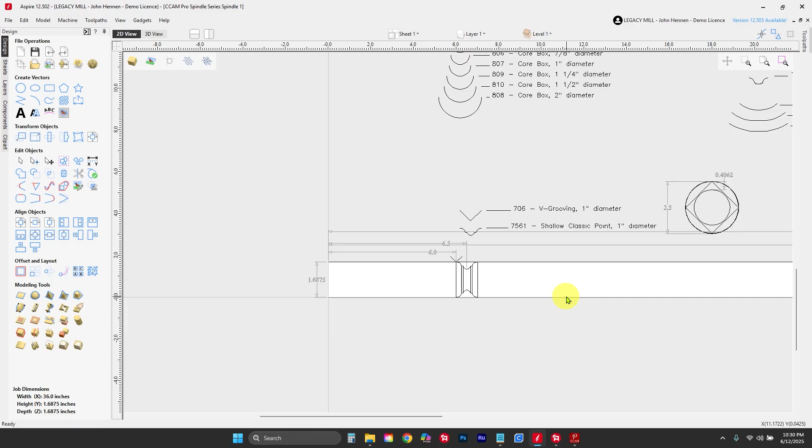Let's take a look at our first spindle. Our first spindle here we know is 36 inches long total. We know that the finished is going to be a 1.6875 or essentially 1 11/16. We know that our V-bit's going to start here in the transition from square to round at 6 inches. We know from 6 inches down to 30 inches, we are going to need to turn it round. We're going to turn it round to that 1 11/16.

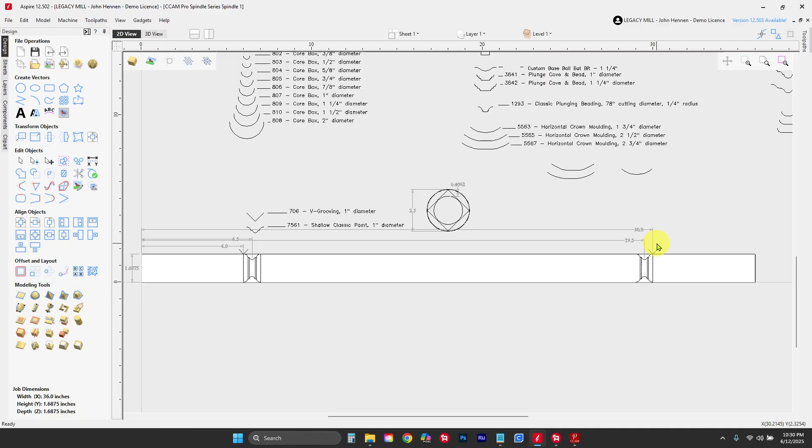And after we're done doing that one, we're going to plunge in with our shallow classic point right here, and we're going to drop that one down at 6.5. Let's go ahead and start working in Conversational CAM Pro. Now, the first thing we have to do is we have to actually start a project. So we're going to go here to Project, and we're going to make a new project. And this is going to be a 36-inch spindle, and this is going to be the CCAM Pro series. Gotta spell that right.

All right. Now we're going to be working in the turning center. In the description, I'm going to call this 1.75 by 1.75 by 36 square blank. And you could make this the Hennen's staircase baluster, or the Anderson staircase baluster. You can name it whatever you want to make sure that you remember what you're doing it for. All right, so let's go ahead and click on Save. Got it? And let's do this and select. Now we've defined what we're going to be working on.

We're going to click on the turning center here, manage our parts, and let's add a part because we're going to need one of those. Let's go to a new part, and the part name is going to be 36-inch square blank. And in here, we're going to make a multi-sided blank. The length is going to be 36. The thickness is going to be 1.75, and the number of sides is going to be 4. It's not tapered, so we're going to go ahead and save this one here. And here we have now our blank, all laid out and ready to go. We go ahead and select here, and click on it.

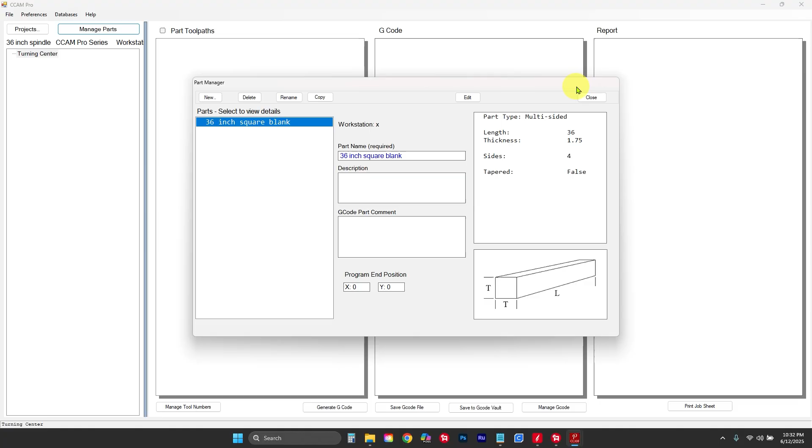We have our blank now, and now is where we start adding all of our tool paths. So you can notice that first we had to define the project, and we had to define what we're working on, and now we can start our tool path. So we're going to manage our tool paths here. We're going to do 3 separate tool paths. We're going to start by going to turning, turning round. We're going to add that one. The second one will also be turning, and that's going to be a tool profile. And the third one will also be a tool profile. Once we've got all those in, we click on close.

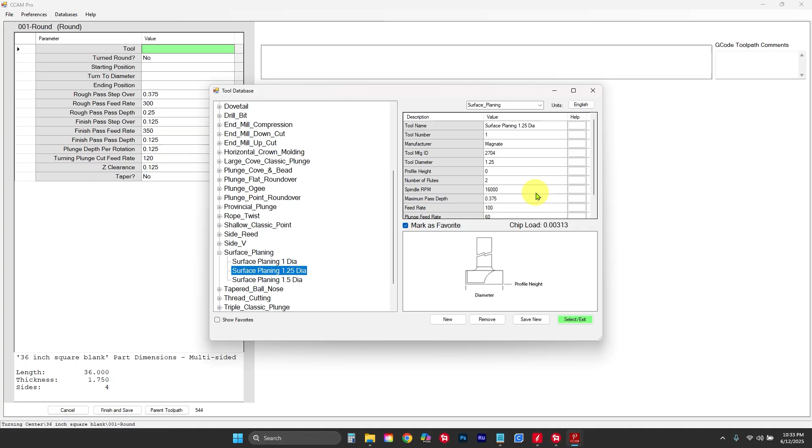And you'll notice over here that they're all red. Now red just means they haven't been programmed yet. So we're going to go ahead and select our first one, which is round. Okay, and turning round, we're going to pick our tool for that one. Now when I'm doing this one, I always like to use the 1.25" surfacing bit. Let's go see where you can find it. I'm going to surface planing, 1.25". Here it is. I'm just going to leave that there and click on select and exit. I'm going to make this default tool number 1 because it's the first tool in my program.

If you're using an automatic tool change machine, tool numbers are very important. If you're using a manual tool change machine, they're still pretty important. You can't have 2 tool numbers that are the same if there's a different geometry. In an automatic tool change system, you've got to make sure that each one of them are different so that the machine knows which station to grab those tools from.

First question, is it turned round? And the answer is absolutely not. So that stays no. Our starting position, 6. We're going to turn to the diameter of 1.6875, 1 11/16. The end position is going to be 30. We're going to come down here all the way to the bottom. Everything else is already answered. Let's go over them real quick.

Rough pass step over. When I'm just taking off material, we're going to go at a pretty quick step over, go 3/8 of an inch. It could actually go more. Rough pass feed rate. Now this is set at 300, but I'm pretty impatient, so I'm going to make that 600 instead of 300. Rough pass depth, 1/4 inch. That's phenomenal.

Finish pass step over, 1/8 of an inch. That's going to give us a nice clean diameter there, no tooling marks, things like that. Finished pass at 350, I'm going to bring that up to 450. You'll notice it's a little slower and we're taking a little smaller bite. We're going to get a nice clean finish on there. Everything else I'm going to leave the same.

I'm just going to click on finish and save, and we now have this one that's no longer red. So if we want to see what that toolpath looks like, we can click on it here, say generate G code, and here is all of our code. Let's grab our turning round bit right here, and it's going to do the work for us. Quick, fast toolpath, and all we're doing is we come back here and we're going to turn it round from 6 to 30.

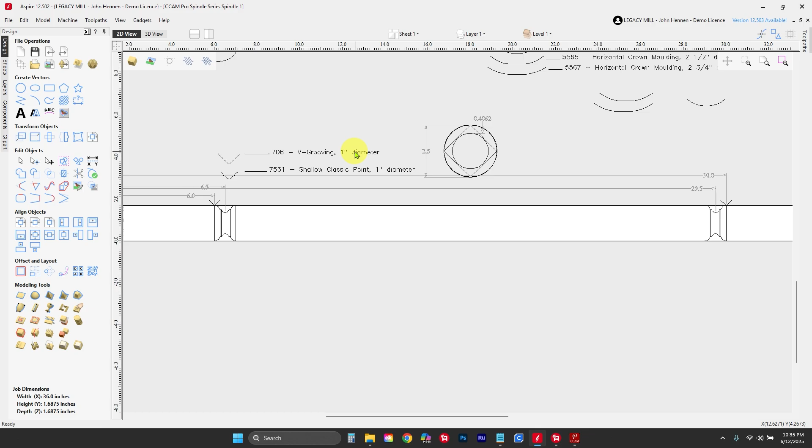Now right at 6 and right at 30, our next step is to add that V bit. Now this one's a little tricky. You select our tool, and we're going to make sure we get a V bit big enough to do the job. When I came over here, I noticed that 706 with a 1-inch diameter is going to give me a 1/2 inch height, and you'll notice here that we need a 0.4, so that's going to be perfect.

Section diameter is going to be 1.6875. X-axis position is 6. Use profile height? On this one's case, no. We want to make our cut depth 0. And what that's going to do is bring it down, touch that, whip around once to clean it up, looking really nice, and then we're good to go.

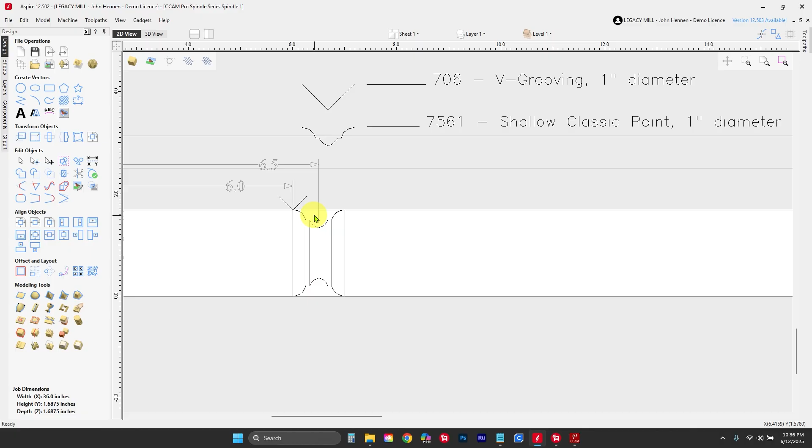What's important here is our climb mill side is the left. Look at this one right here. On this first one, I want my left side to be nice, because my right side's going to be machined off anyway. Okay, everything else looks fine. We're going to say our next one is going to be 30. Now this is the cool part about CCAM Pro.

Go 6, 30. And now we have 2 options. We can just go ahead and say finish and save. If you look at this one here, go finish and save. Now let's generate our G code again. If we come down here, we're going to have our first toolpath right here at 6 inches, and because we put a comma in there, our next one right there at 30. Now that's pretty phenomenal in my book, because by only adding one tool profile toolpath here, we can actually put it in multiple locations. Really like that feature of CCAM Pro.

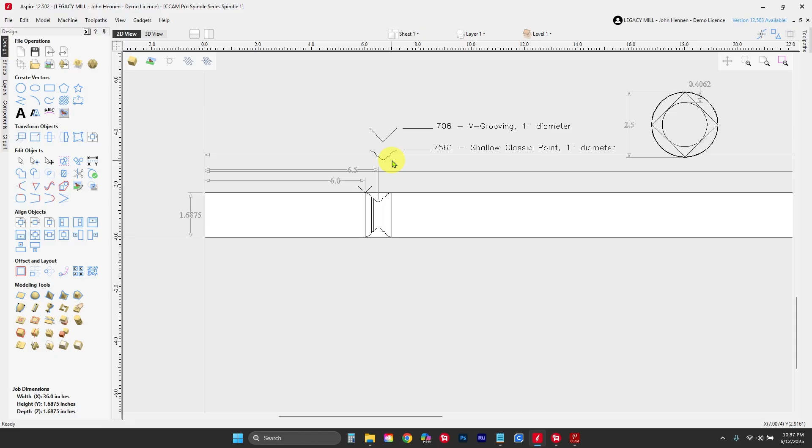Now let's go on to tool profile number 3. And this tool, this time, if we remember it - and I don't, so we always have to look - it's the 7561, the shallow classic point, 1-inch diameter. Let's go find that here. Let's go see what we've got. Shallow classic point, 1-inch diameter. All right, make sure it is the same, 7561. We're in business, go ahead and click on that one.

We're going to assign a new tool number, it's going to be number 3. Section diameter again is 1.6875. Our x-axis positions on this one are going to be 6.5, comma, 29.5. Use the profile height on this one? Absolutely. What that's going to do is give us this nice plunge shape right down into our board. Okay, we're happy with that one. Climb milling looks great. Finish and save, and let's go ahead and generate that G code.

Now we have 3 tools: tool 1, tool 2, tool 3. We're going to do a couple different operations. First, we're going to turn around, that's right up in here. Second is turning our tool profile, doing that in 2 locations, at 6 and again at 30. And here we're going to go at 6.5 and again at 29.5. What that should do is finish all the programming to build our very first spindle. It's just a basic, square to round, nice transition, and nice perfectly round, same diameter, turning down the entire length of that spindle. We're ready to go to work.

So let's go out to the machine and get some sawdust.

Welcome to the shop, it's time to make some sawdust. We've got our blanks cut out, and we are ready to take this and turn it into this. Let's go to work.